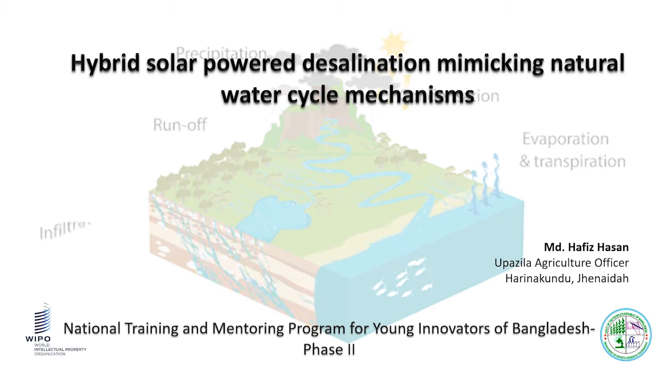If I ask how many glasses of water you've taken today morning, one, two, or five glasses, isn't it? But if I say it's 500 glasses of water, how does that sound? Impossible, unbelievable. Yes, it might sound unbelievable, but if we calculate the water footprint, we have taken at least 500 glasses of water.

Let's look at the water footprint. If you ate just a single egg, that is the output of 163 liters of water. A glass of milk has left a footprint of 255 liters of water. That is the indirect consumption.

Now come to the direct consumption and the water scarcity. Over 2 billion people live in countries where water supply is inadequate, and by 2025, half of the world's population could be living in areas facing water scarcity. By 2030, some 700 million people could be displaced as water refugees. And by 2040, roughly 1 in 4 children across the world will be living in areas of extremely high water stress. This information is from UNICEF, not by me.

This is shocking, obviously, and the more shocking news is that by the time you finish watching this presentation, near about 6 minutes, 3 children will die in different parts of the world from water-related disease. This is a research finding from MIT.

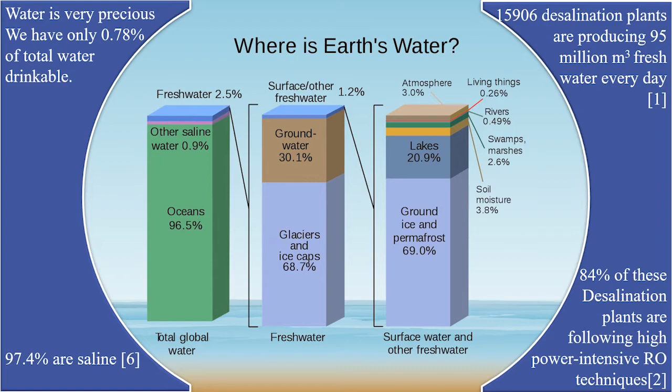That is the main problem, and the problem that I want to solve through my innovation. The sun and the sea, the two invaluable and unlimited resources that we have. So solar power desalination could be one of the best solutions I ever thought of and researched.

But there are some problems with the existing desalination plants. Number one, the traditional RO technique requires a very high amount of electric energy, which is not feasible. Number two, solar power desalination requires a lot of surface area - the higher the surface area, the higher the evaporation and production rate, but it is not too feasible.

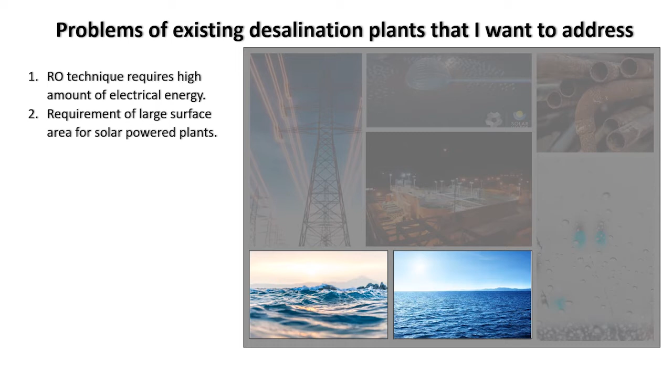Number three, at night solar power desalination cannot work, or even if it is heavy cloudy with no sun during the day, it doesn't produce any fresh water. Solar power desalination plants also have another shortcoming: tiny droplets of water vapor deposit on the inner surface of the main chamber, retarding sunlight from coming in and reducing capacity. Also, thermal distillation is very much vulnerable to corrosion.

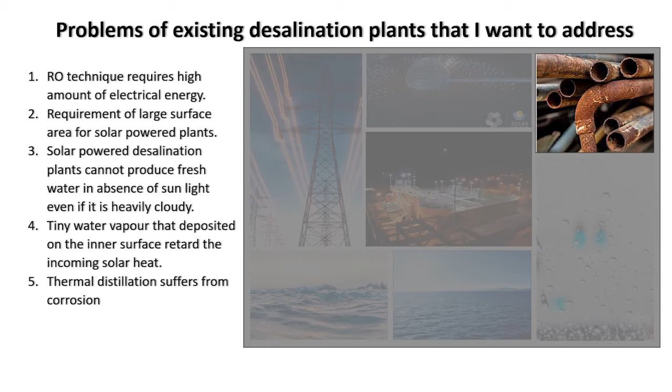These are the problems of existing different types of desalination that I want to address through my innovation. To overcome this, the hybrid solar power desalination plant I've developed has accommodated most of the mechanisms happening in the natural water cycle, including the water uplifting technique taking place within the plant through the xylem tube.

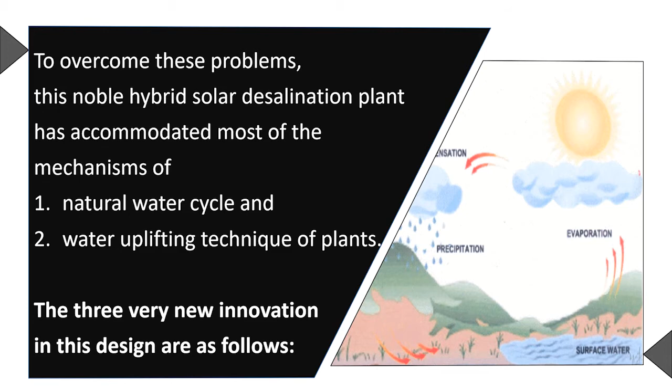There are three very new innovations in this design. Number one, the water uplifting technique. In this design, water will be taken 40 feet above from ground level to the primary reservoir, using a proposed new type of pipe. The final calculation hasn't been done yet, but it is expected to save 40% of electricity compared to the traditional pump and pipe we are using.

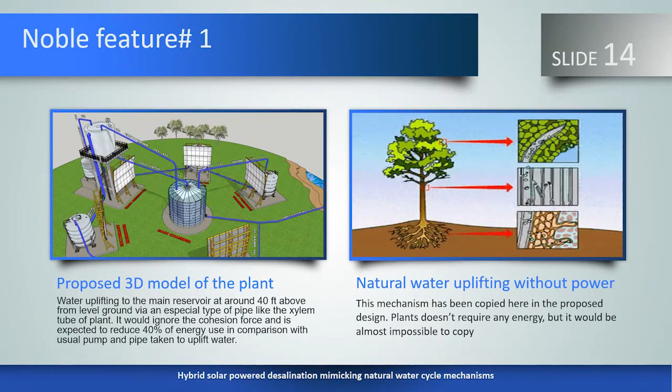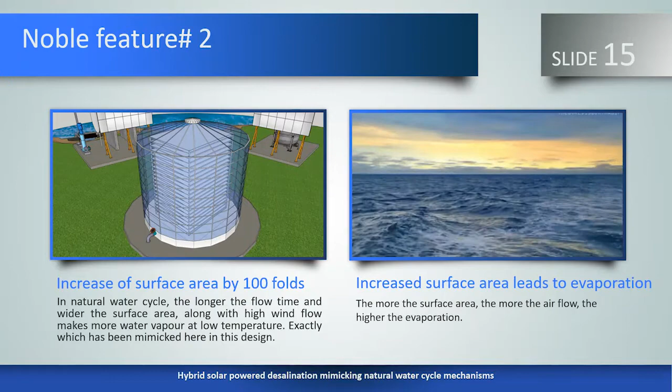The novel feature number two is the increase of surface area by 100 folds. In this research design, the surface area will be increased by 100 folds using 20 layers and 5 channels on each layer. The fine design is still under development; the architecture hasn't been finalized yet.

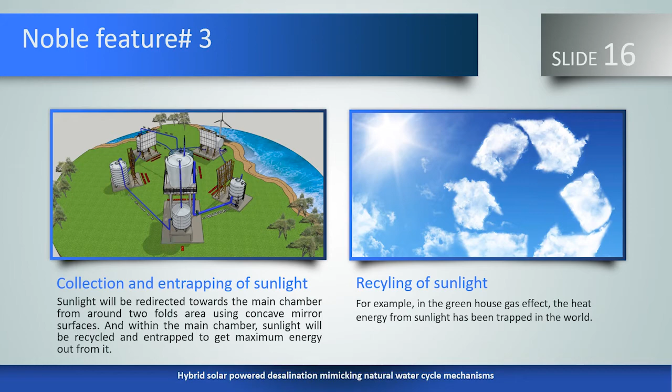Number three and the final novel feature is the collection and entrapping of sunlight, similar to what happens in nature during the greenhouse gas effect. In the greenhouse effect, heat from sunlight is trapped by the carbon dioxide layer and clouds, and the same similar mechanism will be used here in this design to entrap sunlight.

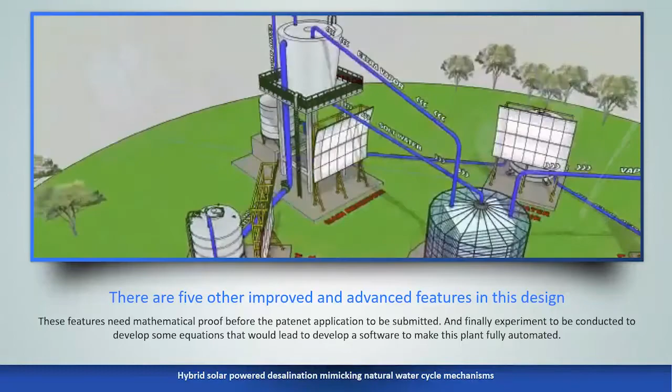There are 5 other improved and advanced features in this design, so I should say this innovation is still at the research phase. I have to conduct an experiment to develop an equation that will ultimately lead to development of software which will finally make this entire plant fully automated.

Now to talk about the challenges: primarily I'm suffering from lack of funds to conduct this experiment, and I think most of you are too suffering the same problem. Secondly, I'm somewhat in fear that someone could change my plan a little and claim it as their own new innovation.

It could be. And the last one, I hope - actually I didn't even know what I didn't know, and thanks to this 2-day workshop, I currently know what to do. I know what I didn't know, and somewhat what I need to know, and I also know what I have to go. Where is the place to get the solution to these questions?